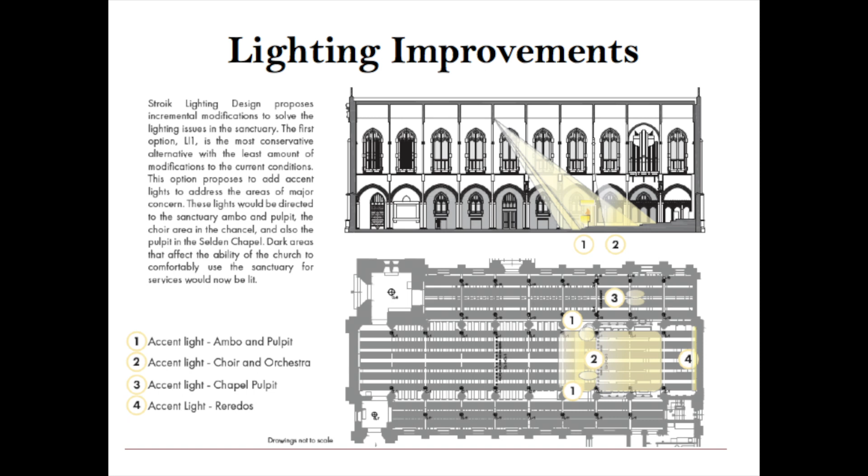The Great West Window, which was just recently completed, looks more glorious than ever. The lighting system has been transformed. On the drawing, you can see that it consists of banks of new lights on the top beams and on the rood screen. The cost of this work was approximately $5 million.

It was substantially completed in mid-2019, and we were able to pay all of the bills, including the loan financing. We emerged debt-free. The key to this success is the patchwork quilt of funding.

These first three phases of our 2016 master plan included the most urgently needed work to save the buildings. Phases 4 and 5 are the next most critical ones and will be combined into one construction operation. The work in Lloyd Hall and the parish house are so interconnected that it is impossible to separate them into two phases. Phase 6, which is the restoration of the Lychgate Garden, is very much on our minds.

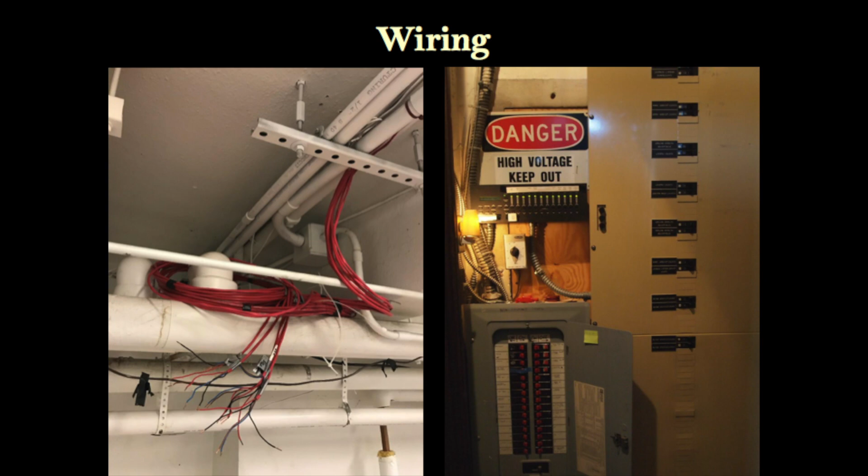The mechanical and electrical systems are a hodgepodge of makeshift improvements, constantly breaking down and in need of repair. For the past 7 years, we've been working to find a solution for this never-before-solved problem.

It began with small incremental improvements. When it became clear that there were major fundamental changes that had to be made, we retained Hartman-Cox, architects from Washington, D.C., to help us conduct an inclusive process with the parish and find a creative solution.

That plan is a physical design, but it is also a strategy for organizing the functions of the parish. It includes the following: abandon the uninhabitable basement of the parish house, move the choir up to the clean space on the 3rd floor, and move the children's program to the 1st floor where they belong.

Use the ground floor of the parish house for programs. Move the offices to the 3rd floor. Provide a single point of entry to the parish house during the week, to eliminate a great deal of confusion and security problems.

Provide an elevator to make all floors accessible, and provide a new energy-efficient heating, ventilating, and air conditioning system, which will be a geothermal system to save energy and eliminate that museum of mechanical equipment we currently have next to the Stockley entrance. The plan illustrates the concept for the ground floor.

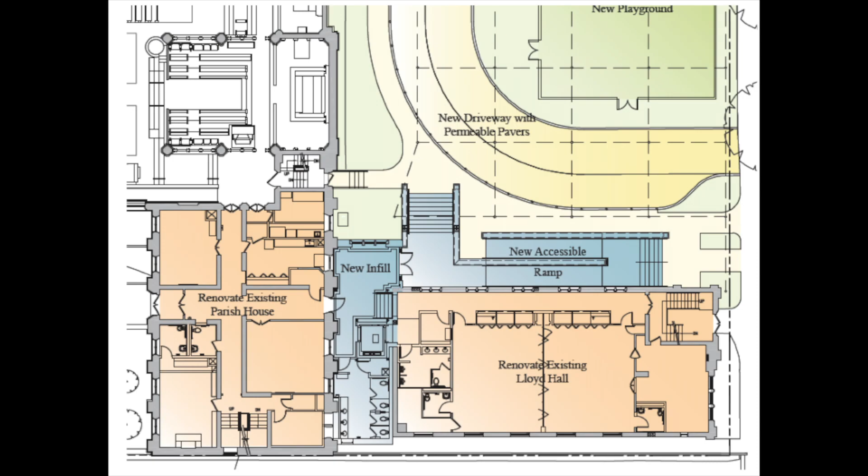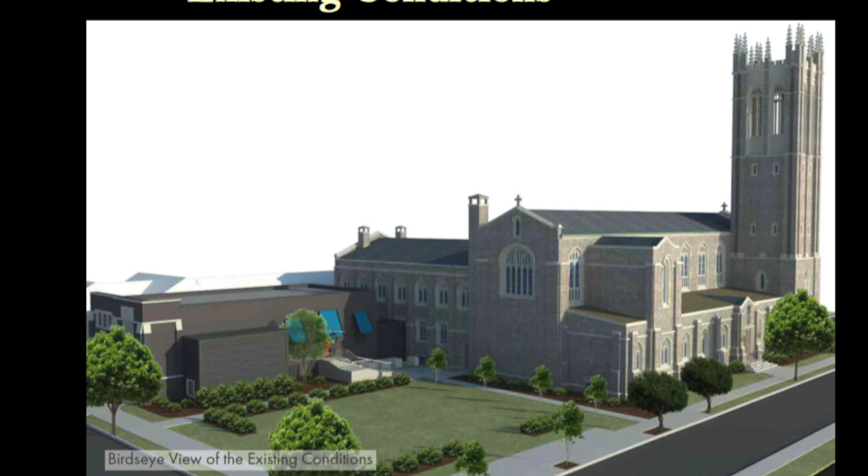In this aerial view from the digital model that the architects created, we can see the existing conditions of a view from the corner of Boissevain and Stockley Gardens. You can see the current stairs going up to the parish house, the blue awnings to mark the entrance, and you can see the little breezeway connection to the church and parish house.

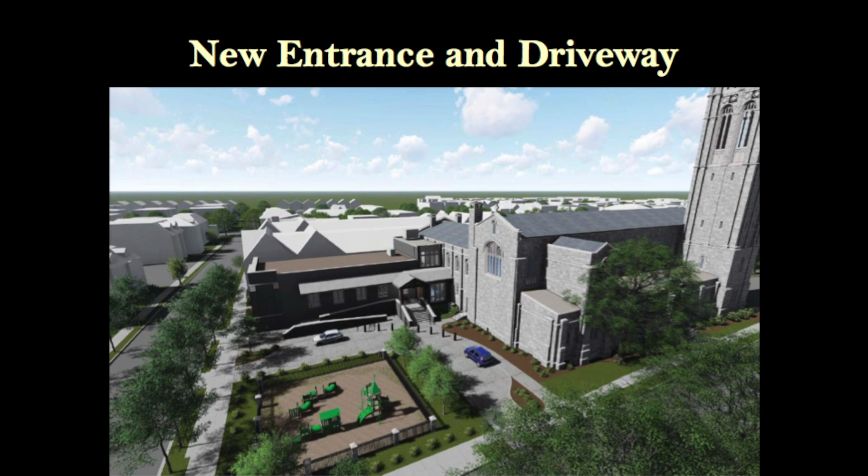In the second aerial view, which illustrates the proposed changes to be made to the parish complex, you can see the entry drive, you can see the ramps leading up to an entry porch, and you can see the infill building between Lloyd Hall and the parish house. Between the entry drive and Stockley Gardens is the location of the playground.

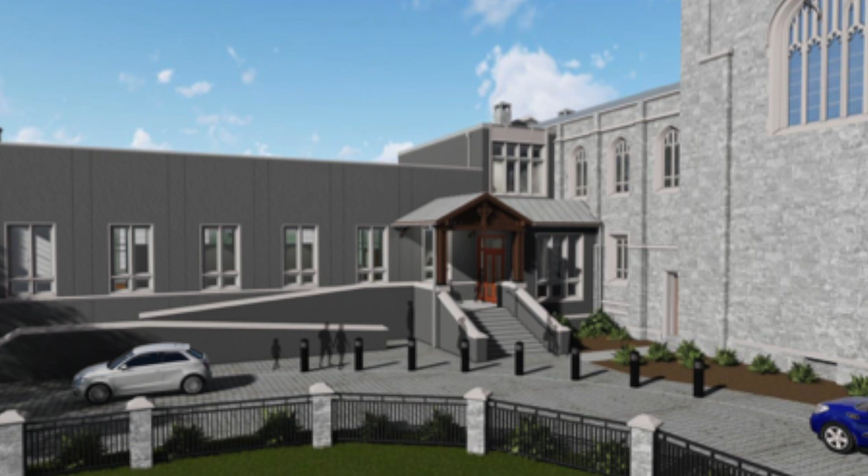This closer view is an eye-level one that shows the design of the entry porch. It is residential in scale and we hope welcoming. The porch can be used by persons waiting to be picked up. The accessibility ramp is in two parts. The second part will be covered by a canopy.

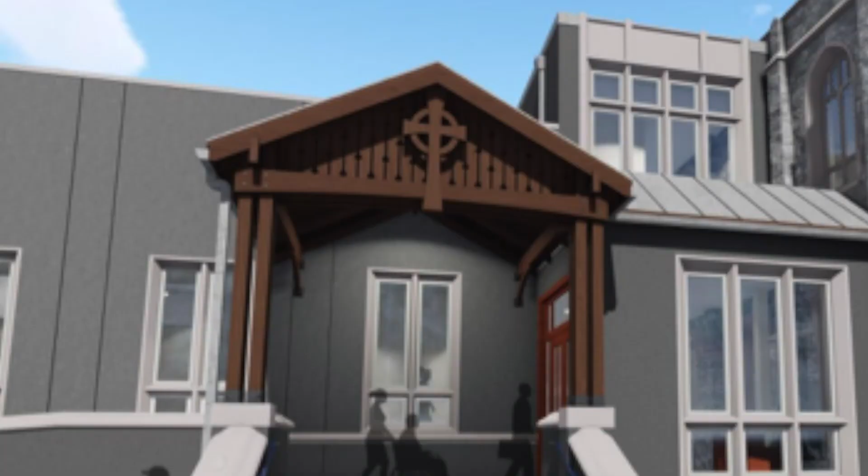In this view, which is what we will see as we approach the steps, you can see the detail on the porch. It resembles the Lychgate garden entry, and it also is similar to many of the porches that you see on houses in Ghent. The area to the right at the top of the stairs is the reception area. Above, you can see the elevator lobby and reception area on the second floor.

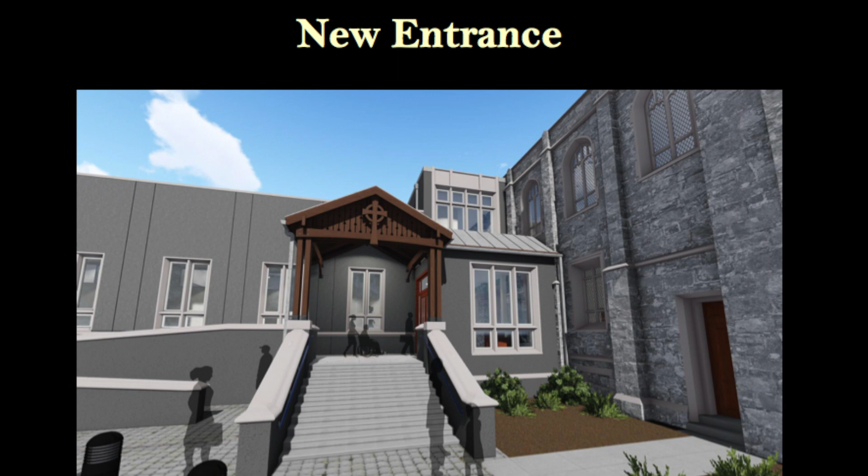When you enter the building through the double doors from the porch, you will see the reception desk. Behind it is the stained glass window currently located in the vestry room, which came from Old St. Luke's Church. Experts have told us that it is the most valuable one we have.

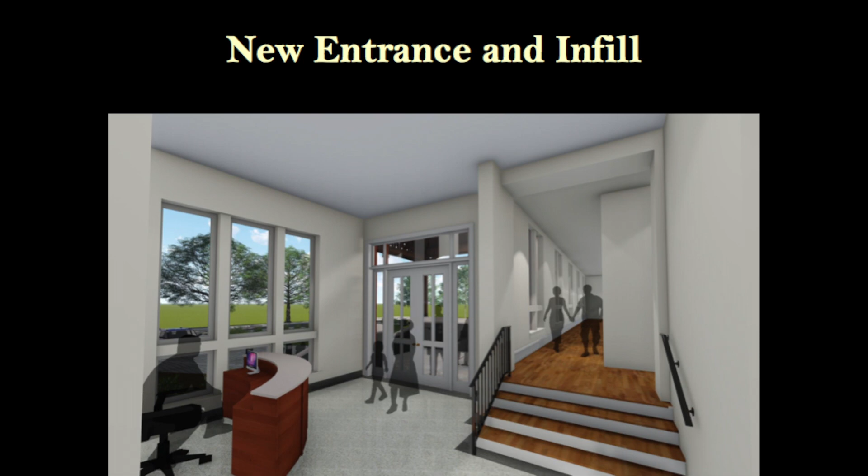In this view, taken from behind the reception desk, we are looking back to the entry doors on the left, and up to the steps that lead to the passage along Lloyd Hall, which will have new, large, and expanded windows.

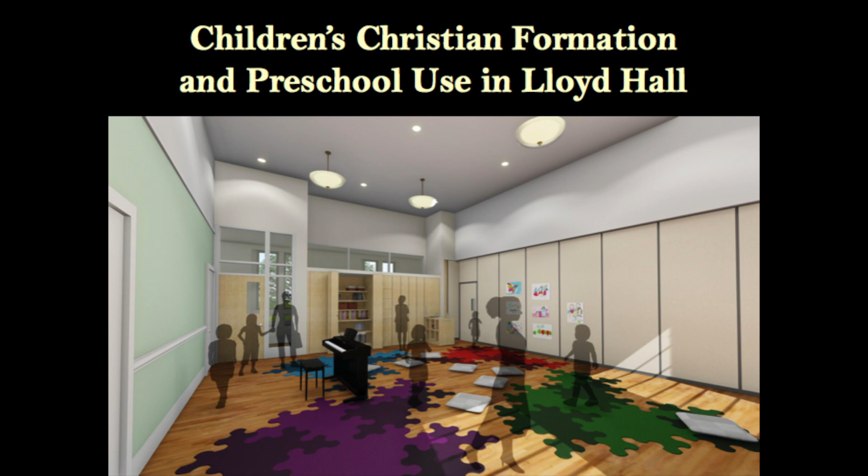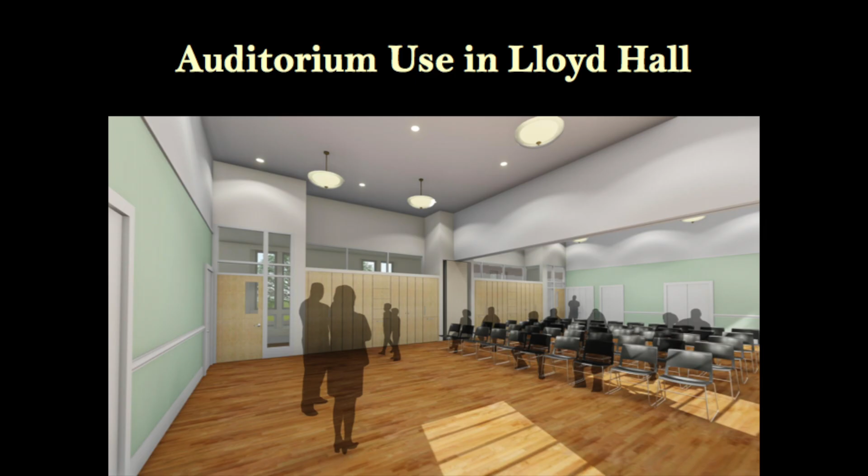The construction strategy for this project involves reorganizing what we architects sometimes refer to as the bones of the complex. That is, the most fundamental parts of the building: the structure, the circulation, the mechanical equipment, things like bathrooms, elevators, and stairs, which are permanent fixtures of the building. In order to get a building to work properly, we need to get the bones right.

Right now, they're not. To do this scale of construction requires a large-scale operation that must be done all at one time. The construction of an elevator and providing new mechanical and electrical systems cannot be done piecemeal and incrementally. Later improvements, such as adding bookcases or creating ornament or additional furniture, can easily be done incrementally over time.

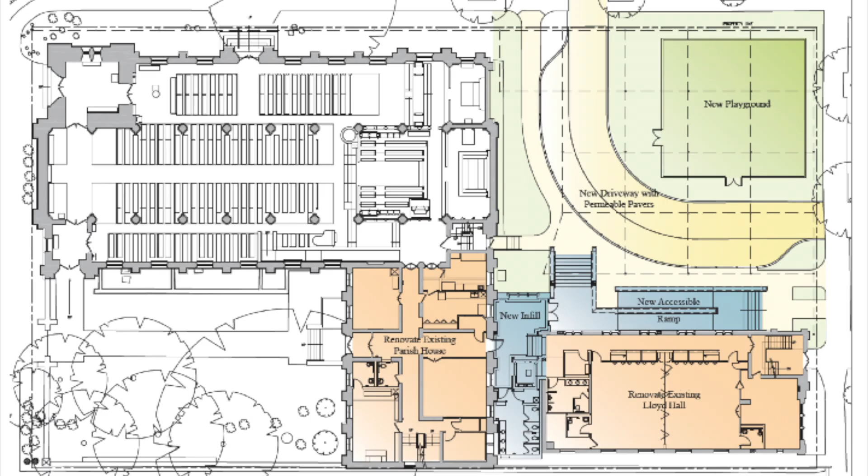You can see the importance of the grant for the preschool. It represents 42% of the total cost from our major donor.

We will continue to use income from endowments, which will be about 3% of the cost. We are going to apply for tax credits, and our advisors inform us that we can expect about 14% of the cost to be covered by those tax credits.

We were fortunate to receive a matching grant challenge, which provided an additional 4%. We are in the process of securing additional grants for an additional 3%.